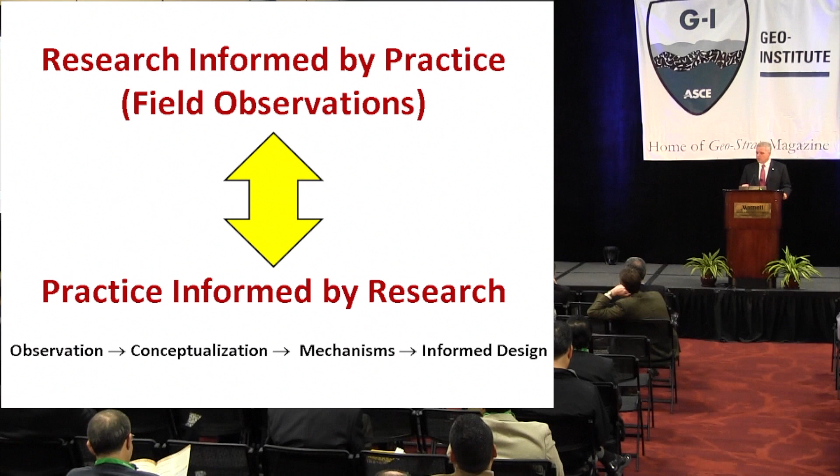I think of it at the very bottom of this slide. Really, we start with observation. We conceptualize a mechanism, develop and understand the mechanisms and quantify them, and then we build that back into our theory, and then we create informed design. This loop continues — it's an important part of the way we approach our practice.

So how does this all fit into geosynthetic clay liners? I think that'll be clear as we go through this. These are really neat materials — I think they've revolutionized the waste containment industry. First used around 1990, they've essentially been used in lieu of traditional compacted clay barriers, and over the last 20 years or so have replaced clay barriers as the standard mineral barrier we use in practice. GCLs have been very widely adopted.

In essence, we have a roll, almost like a carpet — a carpet-like structure that we roll out and place, a lot like a carpet. You can see sheets of it deployed here and over here. Roll it out, overlap it, sometimes put some bentonite within the seam, and we're done. It's a very quick, rapid, and effective construction process that saves money and functions well — certainly much more expedient than constructing a compacted clay liner.

What do these materials look like? They're really interesting — we'll have two geotextiles, typically one on the top and one on the bottom, with some needle punching holding them together, internally filled with granular bentonite, nearly dry bentonite. This almost looks like a sand-sized material, and when you look at this figure, it looks extremely permeable — it looks like water would flow right through it, right?

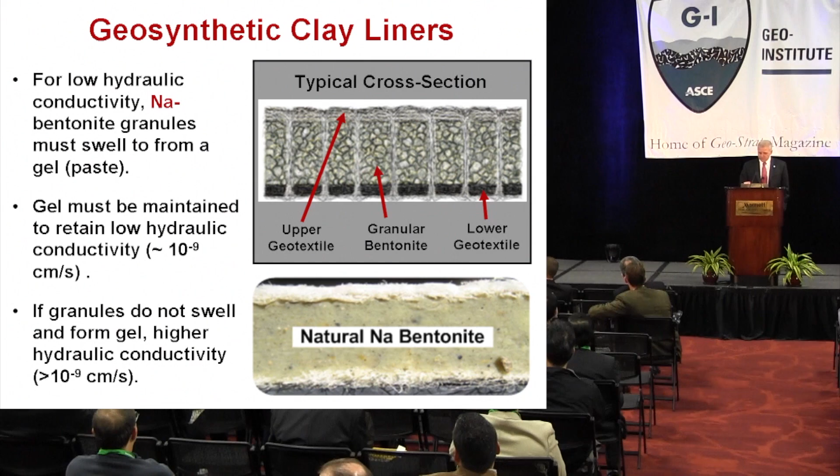I think this has been one of the things we've toiled with over the last 10 years — really understanding the coupling of these physical and chemical processes. And that's largely what we're going to talk about today.

Well, where did this get started? Our research is really driven by practical problems. I got started working on these physical and chemical interactions of bentonite probably about 15 years ago with my colleague, Professor Tuncer Edil. We were dealing with interesting large-scale case histories — one of them a big mining project in northern Wisconsin for a tailings facility, where we were trying to contain a leachate with a collection of different metals. Then another case history came along: one was a liner problem, the tailings facility, and the other was a cover problem — a barrier system placed over a coal ash facility in southwestern Wisconsin.

That's what I'm going to start with today — this latter case history, the cover. These were both problems that came up around the same period of time, dealing with GCLs, and it was the practice that informed the research. It began with a practical problem.

To illustrate, this is a surface barrier or cover placed over a coal ash facility. Looking at the surface materials, we have a vegetated surface layer — I have some of my engineering plants in it, you can see right here. My plant physiologist friends always make fun of my plants, they look far too simple. But I do have some roots in them, and those roots penetrate down through the surface layer, and at the bottom of that is a GCL.

That's our hydraulic barrier — the impedance to flow, preventing precipitation up in the atmosphere from making its way through the system and getting into the waste below. So the idea is a hydraulic barrier, a clay barrier, this GCL placed beneath a superficial vegetated cover soil, and this final cover altogether was meant to minimize the amount of liquid entering the underlying waste. Now, this was the first GCL deployed in Wisconsin at the time in a final cover.

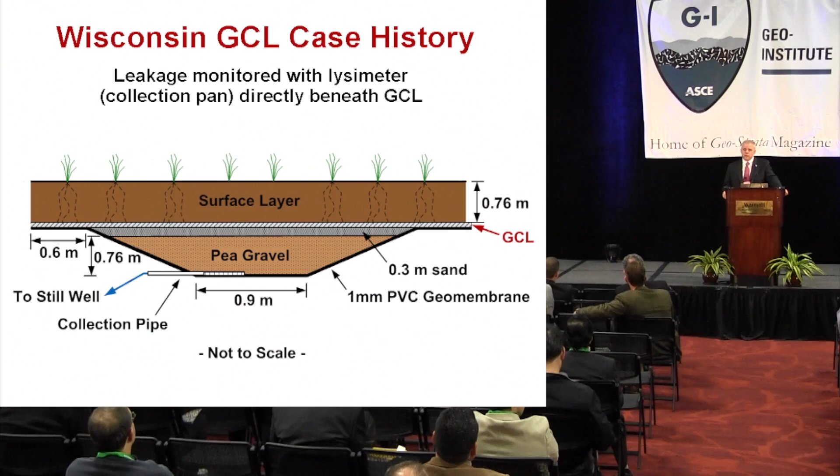If we know GCL has a hydraulic conductivity of roughly 2 × 10⁻⁹ centimeters per second under stresses typical of covers, and we do simple calculations understanding the variation in gradients throughout the year that we see in cover systems, I'd expect on the order of a few millimeters of flow through the system per year - maybe 1, 3, or even 5 millimeters per year depending on assumptions. So they began monitoring this, and the results were surprising.

This is cumulative percolation on one axis and time on the other. This is data collected by the engineers who designed this facility, which I graphed up later, but it's their data. Remember, I said a few millimeters per year - now notice my scale, I've got 1,000 here. So everything is within a couple orders of magnitude.

Within one year, one of the two lysimeters indicated that the percolation rate flowing through the cover system was much higher than anticipated - appreciably higher, probably two orders of magnitude higher, at least in one lysimeter early on. There was concern that lysimeter had a flaw, something done inappropriately, so they reconstructed it from scratch, ripped it out, rebuilt it, and began collecting data again.

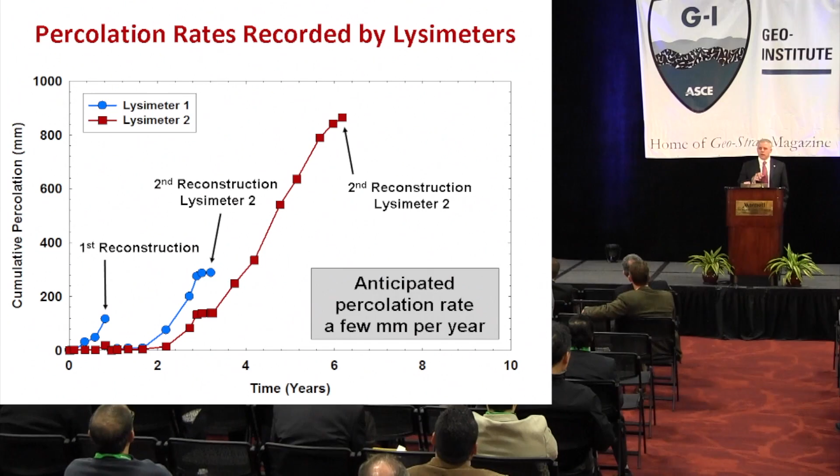About a year later, the percolation rate was climbing very high again, much higher than anybody expected. A little later, lysimeter two, though delayed, showed similar behavior - percolation rates tended to climb. So clearly something was not functioning as we anticipated. We begin here with an interesting problem: something we thought would function one way is behaving very differently, and the question is why?

We had the opportunity to dig things up - I do a lot of that. People who know me and work with me know I spend a lot of time in the field, in pits, looking at things. This comes back to observing phenomena and using that observation to drive our understanding, developing conceptual models and mechanisms, and ultimately informing our practice by understanding the processes. But it begins with observations.

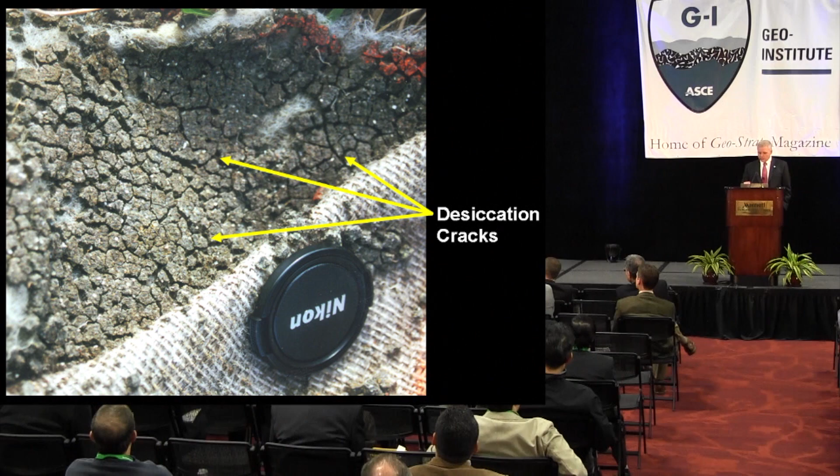This is one of the interesting observations we made during the exhumation - this is the bentonite meant to be the hydraulic barrier in this case. It doesn't look very impervious, doesn't look like that gel I showed you earlier. In fact, it's got lots of cracks in it - it looks very permeable. This photograph was taken by Brian Albright, one of my former PhD students, circa 2000.

We exhumed the GCLs in these lysimeters and found very interesting behavior. We did this at two different times, in 1999 and then 2002. One thing we found was that water contents were quite a bit lower than expected, particularly in 2002 - in our second exhumation, they were down around 20 or 30%. When we hydrate GCL in the laboratory, we'd expect water content on the order of 100% or so. These are much, much lower.

The other thing we observed, when we measure the swell index - a measure of the swelling potential of the bentonite...

The new GCL was about 24 milliliters per 2 grams, the kind of odd units we use for swell. Our swell index for these bentonites that we were taking out of the GCLs were appreciably different. So the swelling potential of this material had changed. It had been transformed during its relatively short life of a few years within the cover system.

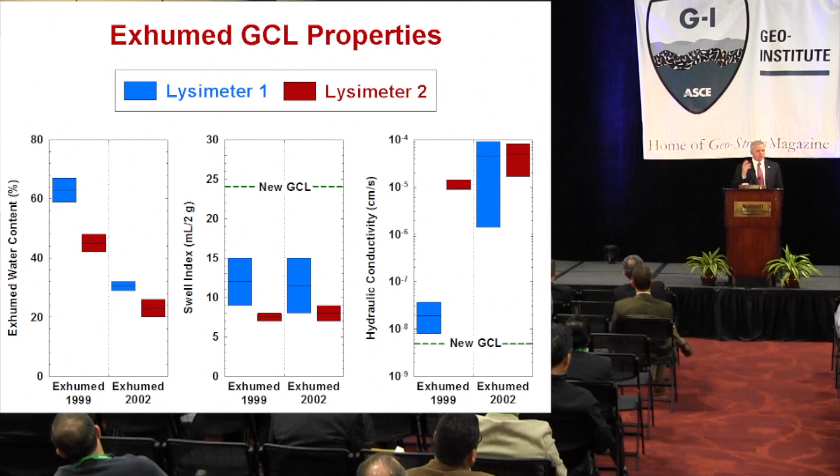We know bentonite is a highly swelling material. When it can dry and shrink and crack, we expect that when it rehydrates, it will wet back up, it will swell, and those cracks will seal shut. At least that's our underlying hypothesis. So we're beginning to question whether that hypothesis is valid.

At the time we were doing this, Steph Melchior, a soil physicist in Hamburg, had been doing almost identical work at the Georgswerder landfill in Hamburg. He hadn't built lysimeters, but he had buried GCLs and let them sit in the ground for a while, then exhumed them and found similar types of behavior. He hadn't measured the hydraulic conductivity at the time, but he exhumed them and found they were filled with cracks.

Then later on, a couple years later, he exhumed them again and measured the hydraulic conductivity, and we saw the same kind of things that we did. We began to wonder what mechanisms were driving this. We know in cover systems there's a very periodic wetting and drying process as part of the hydrology of the system. That was clearly a clue, something we were thinking about, that there was some wet-dry cycling present that was driving this process.

So we began with some very simple experiments. This is Ling-Chin Lin, one of my master's students in the late 1990s. We always believe in starting off with something very simple and then building up our knowledge base, building things that are more sophisticated as we go forward.

These were simple experiments where we would take a sample of a GCL, essentially a disc. We would permeate it in our laboratory until we got to a steady state condition, then pull it out of the permeameter and set it on the lab bench to let it dry. We would record the mass over time and wait till it stopped drying, so it lost as much moisture as it would within the thermodynamic conditions of the laboratory, and then we would begin the process again and permeate it. This is the type of behavior we saw.

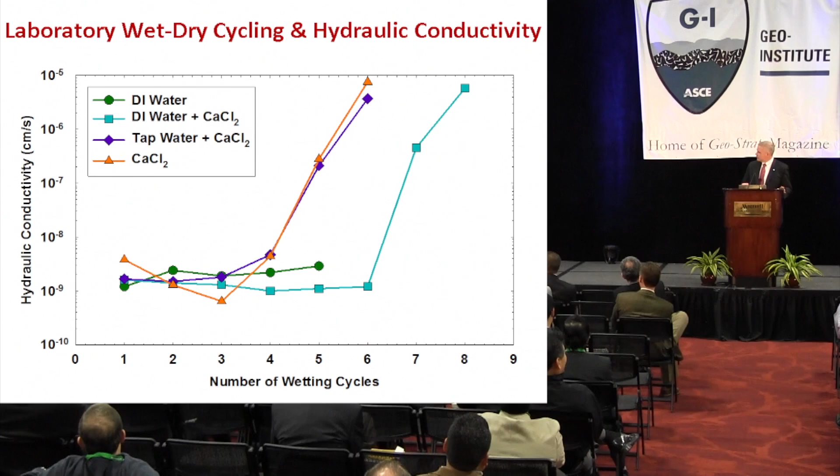So what did we see? The other thing that we looked at was the swell index of the bentonite. If you remember, with the test we ran with calcium chloride as the permeant water, the hydraulic conductivity increased appreciably. Those with deionized water, essentially a water which would not alter the chemical state of the bentonite, the bentonite would stay in its sodium or sodic state. Those remained essentially the same.

And if we look at what we see from the free swell of the bentonites in those GCLs, those permeated with calcium chloride actually began to diminish. So there was a process that was occurring, a chemical process that was altering the physical behavior of the bentonite. It was losing its ability to swell, and the swelling capacity and formation of that gel structure I showed early on is really key to the success of bentonites functioning. In contrast, if we permeated them with deionized water or tap water, they remained essentially the same. So no alteration versus a very significant alteration.

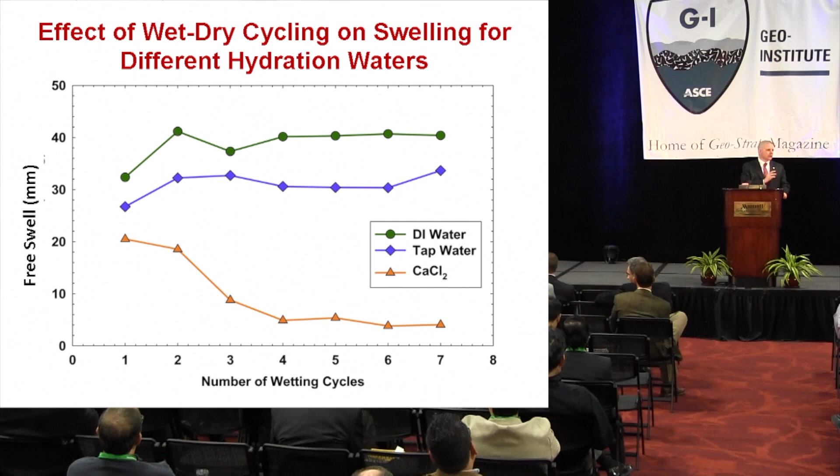You'll notice that on my previous slide, I showed that transition in hydraulic conductivity with the calcium permeants was right around 4 or 5 cycles of wetting and drying. We see on this graph here that right around 4 or 5 cycles, we've really kind of bottomed out on the swelling capacity. So the bentonite is transformed from a highly swelling material to a material that swells very modestly and doesn't have the capacity to potentially heal cracks, as we'll see in a minute.

There's actually been a great deal of work understanding the thermodynamics and the chemistry of calcium, magnesium and sodium in bentonite materials. There's a whole plethora of articles on this that go back to the 1950s. This is a classic paper published by Norrish in 1954, a graph from his paper, where he articulated the different components of bentonite swell.

Bentonite is predominantly comprised of montmorillonite mineral, and montmorillonite is a 2-to-1 mineral, so we have 2-to-1 sheets. Those sheets are fairly weakly bonded together, and when the bentonite is placed in water, the montmorillonite will hydrate. The water molecules associate with the charged mineral surface, and those sheets separate - as opposed to other minerals where they're fixed with a strong bond. In montmorillonite, they separate, water molecules make their way between the sheets, and that's what drives this. That's what makes bentonite such a highly swelling material. The sheets separate, water molecules fill that interlayer region, and it expands appreciably.

What Norrish showed were 2 things: this swelling process occurs in a couple of different steps. The first step is what he calls crystalline swell, essentially the first steps of hydration, where the first layers of water molecules associate with the montmorillonite surface. That results in a swelling of roughly 1 nanometer. We call that crystalline swell, shown in this region here.

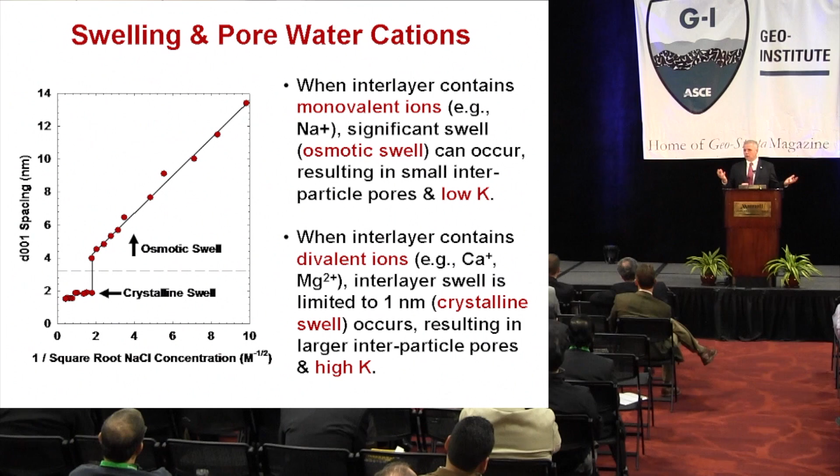When they were divalent cations, like calcium and magnesium, osmotic swell was no longer present. We only got crystalline swell. So if we have bentonites that are primarily calcium and magnesium bentonites, they don't swell. Those with primarily sodium cations on the surface do swell. So a fundamentally different behavior between a calcium magnesium bentonite and a sodium bentonite. This goes way back to the 1950s from Norrish's work.

I think this photograph illustrates this really nicely. We took a bentonite essentially at the same mass per area as we would have in a GCL. And we ran the old GRI swell test. This is a test where you would take the bentonite out of the GCL, put it in a CBR mold, put a CBR plate on top of it, and then put an LVDT on top of that. Then you pour water into the mold, watch it swell, and record the swell.

You would end up, if it was swelling a lot, with this large patty here that you see on the top. This is a bentonite that's been hydrated in deionized water. Look at that tremendous swell, that gel structure. It's really transformed from a granular material to a gel material.

Let's replace the pore fluid from deionized water to a stronger calcium solution where that calcium will replace the sodium in the bentonite. Very different behavior. What do we see here? We see virtually no swell. You can almost, if you look carefully, see the bentonite granules in this slide. So there's been virtually no swell at all. Same material, but very different physical behavior depending on the chemical condition.

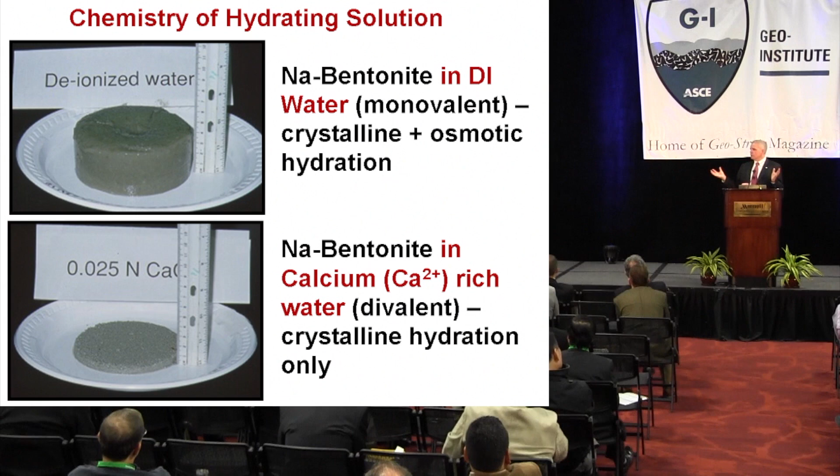So the chemical condition alters the physical behavior, and ultimately is going to alter the hydraulic conductivity as well. If we look at these photographs, actually prepared by Joe Scalia for me, I think they illustrate this as well. This upper photograph is a sodium bentonite, again hydrated in deionized water. It forms a gel-type structure, and you can't see any of the original granules.

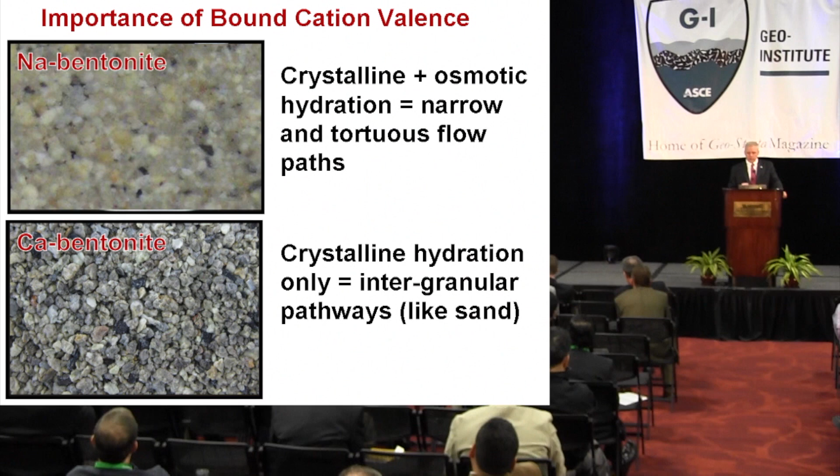The same material, but with a calcium bentonite, again looks like sand. So one is very impermeable, the gel structure is very impermeable, and the granular structure in the calcium bentonite, as you can imagine, is very permeable. So the chemistry is really important in this linkage of chemistry and physical behavior.

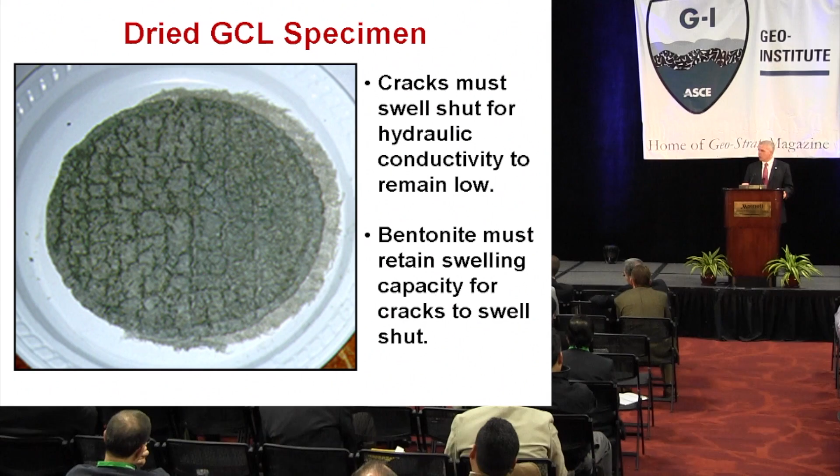You can see the cracks in the GCL. If this GCL is going to be effective when it rehydrates, that bentonite needs to swell, those cracks need to close. If the bentonite loses its ability to swell from a transformation from a sodium or sodic form to a calcium magnesium form, those cracks won't close, and that's what drives the increases in hydraulic conductivity. So the behavior we saw in the field with very high hydraulic conductivities, we attributed largely to calcium and magnesium exchange coupled with wetting and drying, and the inability of the transformed material to reheal itself due to its loss of swelling capacity from the change in chemical structure.

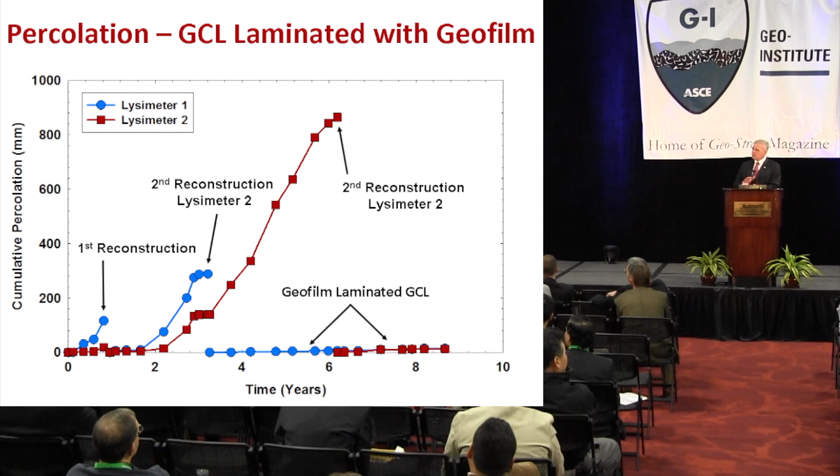Interesting data here as well. Later in the project, they replaced the original GCLs with a geofilm laminated GCL, a composite where the GCL has a geomembrane laminated to the surface on top. The percolation rates to this day remain very, very low at this site, on the order of a couple millimeters per year. So the laminated product, the geomembrane and GCL combination, worked exceptionally well.

We were really interested in this, so we wondered how general this behavior was. We had this one case history, and of course we can't draw generalities from one project. A friend in Germany had observed this, and we had observed it too. It looked like this was an issue, but I wasn't sure how common this phenomena was. So, like a lot of good academicians, you start pinging your federal agency folks and say, hey, I have an interesting idea, can you help me fund a study?

So I did that, and we started off with a small study where we went off and exhumed 4 different covers around the United States, 3 of these in Wisconsin and 1 elsewhere, to look at the condition of the GCLs.

I just had one site, and I wanted to see if this was more general. I picked these sites in a way that I thought would help my hypothesis. I had 3 covers on the right, which were essentially a vegetated soil layer over a GCL, ranging in thickness between about 600 and 800 millimeters, with a GCL at the bottom and different subgrades underneath. These were essentially like the earlier case history I showed, just different sites.

The assumption here is that wetting and drying is one of the driving mechanisms in this process. The other assumption is that calcium and magnesium are exchanging for the sodium, and that the calcium and magnesium was coming from water percolating down through the cover soil, eluting the calcium and magnesium from the cover soils, as we know occurs.

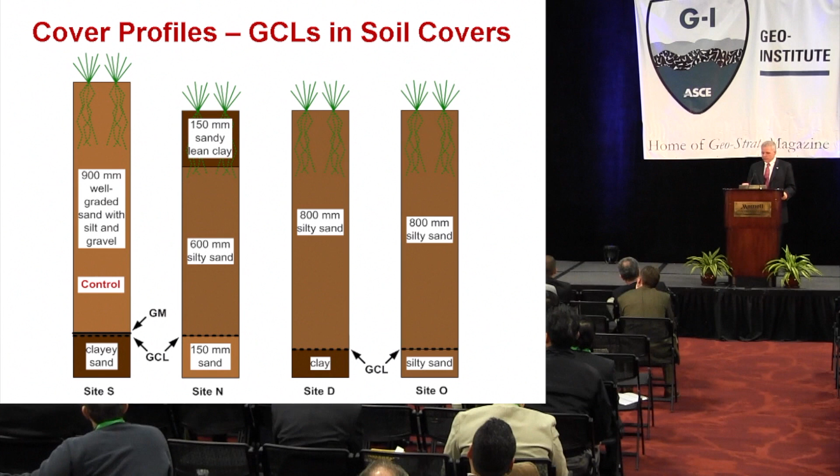So we embarked on this very fun project to go dig these up. We spent a lot of time in pits digging things up and observing them, at the 3 different sampling locations in Wisconsin.

At the same time, my friend Clark Lundell of Republic Services was very interested in this. He had a site in the Atlanta area where he had a lot of leachate in his landfill and couldn't figure out why, since they had capped it, and usually at their sites leachate generation rates drop off appreciably after capping, but he was still getting a lot of leachate. It had a GCL on the cover, so he asked me to come down to this site, site O in Georgia, and exhume the GCL there as well.

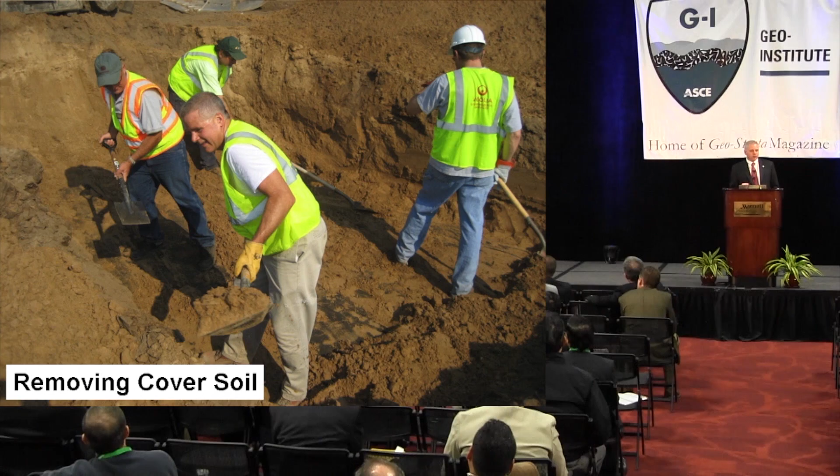So we went out and dug them up. We do everything by hand... well, we got a backhoe out there, dug down close, and then did the rest by hand. This is actually at one of our sites, Site E, which I'll talk about a little bit later.

We exhumed the cover soils, and then we exhumed samples of the GCL. I'll show you a detail in the next slide, but we used PVC panels, putting a lot of attention into minimizing disturbance of the bentonite when we extract the sample. These PVC panels are placed on top of the GCL.

There it is, a PVC sheet. These are about 300 millimeters by 300 millimeters and probably 5 millimeters thick, just meant to be a nice stiff material. We cut around the perimeter of that, cutting the GCL cleanly, and then we pull and slide the GCL on top of it, as you'll see in a minute.

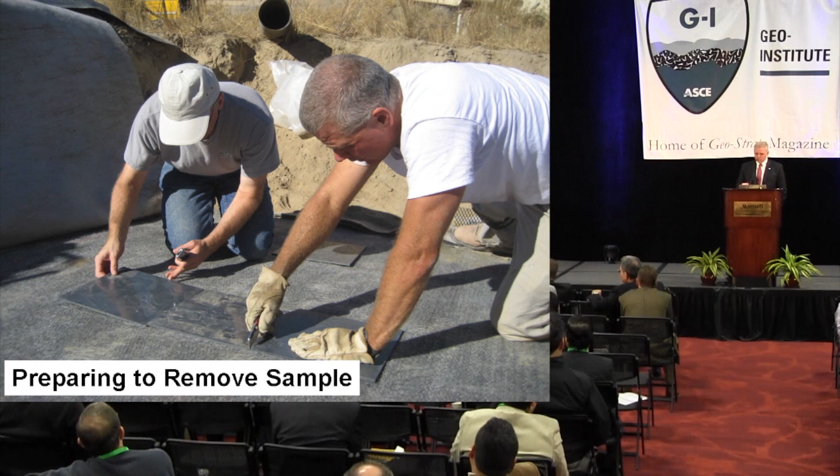You can see in my right hand I've got a razor knife, and I'm cutting the GCL, scoring it right around the edge. This is Jim Olsta, by the way, from CETCO. I'm really grateful to CETCO, a GCL manufacturer, who has been very helpful in this work, supporting it not only financially but actually going out in the field and working with us. This is our site in Boardman, Oregon.

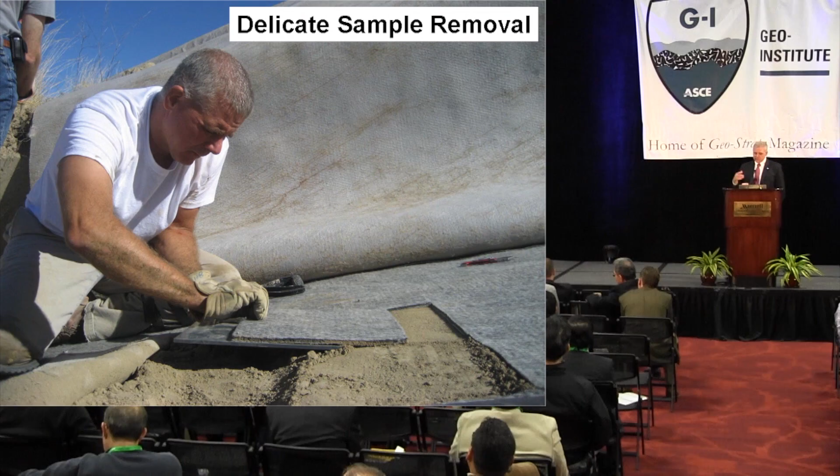Here's a picture of exhuming the GCL. We've scored it around the edge, cut it with the razor knife, and then very carefully slide the GCL onto this PVC plate. Then we wrap it with plastic to prevent it from desiccating, and we bury those plates in a series of tubs, trying to keep stress on the GCL to prevent any stress relief.

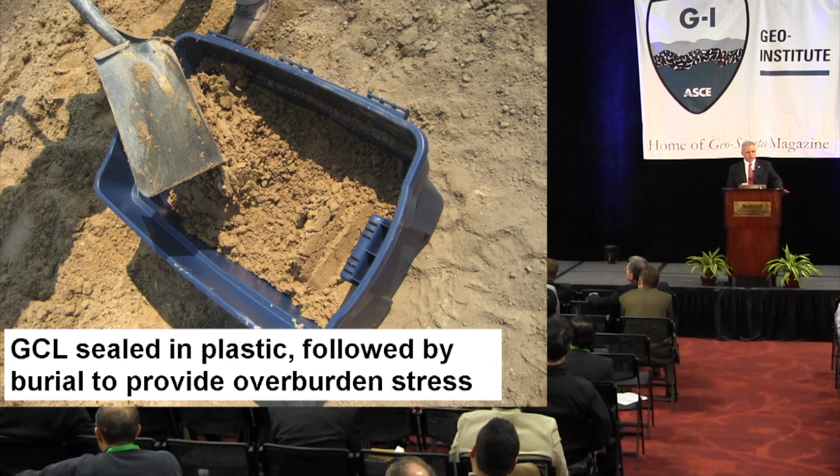We can't simulate the whole cover system, but we try to get at least roughly a third of a meter on top of the GCL if possible, if not even a little bit more. So we bury them in tubs and bring them back to the laboratory.

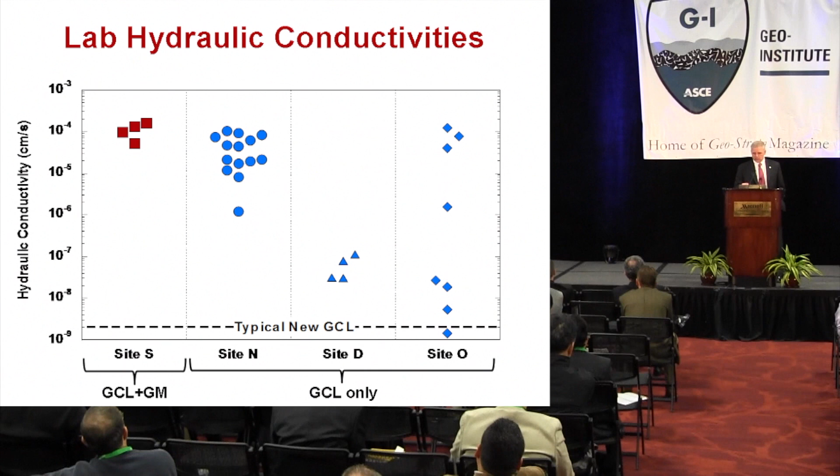So interesting—we didn't see precisely the same thing we saw at that one case history. We actually saw different types of behavior at different sites. Interestingly enough, the composite perhaps had the most permeable samples, and that really got us thinking, what's going on there? To this day this hasn't been fully proven out, but I'll get to more on that in a minute. This was an important learning experience for us as well.

We also ran swell index tests on the bentonites from each of these GCLs. Looking at the free swell graph in green, the bentonite used in these GCLs, when new, is roughly about 35 milliliters per 2 grams. All of the GCLs we exhumed had swell indices around 10 or lower, which is the swell index associated with a calcium bentonite, not a sodium bentonite. So it started at 35 and transitioned to 10 over a service life of 4 to 8 years, roughly, depending on the site.

If we looked at the relative abundance of sodium in the exchange complex—essentially the collection of cations balancing the negative charge on the surface of the bentonite—typically in the bentonites used in these GCLs, about 80% of the cations were sodium.

When we looked at the exhumed GCLs, at most 20% sodium remained, so there's a great depletion of sodium in these materials. The physical and chemical processes are coupled together. We had a transformation from a sodium bentonite to a calcium magnesium bentonite, which altered the swelling behavior and altered

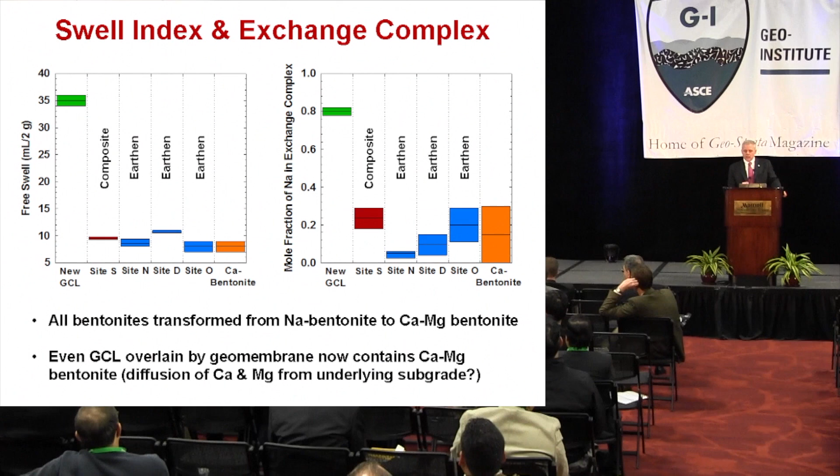the hydraulic conductivity, but still doesn't explain why we got this variation from site to site. Interestingly, I talked about that composite system with the geomembrane, which was meant to cut off water from above that would carry calcium and magnesium and prevent exchange. And yet it was completely exchanged. At our site S, the swell index is around 10, and most of the sodium has been replaced by calcium. What's going on? This isn't something we expected at all.

Very different. The water content was an important issue that differentiated the data we observed. The GCLs that had become hydrated and remained hydrated, essentially became wet and remained wet, retained lower hydraulic conductivities.

Those that had dried, potentially going through a desiccation cycle or several, had much higher hydraulic conductivity. So there was a clear dependence on water content: if the GCL got wet and stayed wet, it tended to have low hydraulic conductivity, whereas if it hydrated and perhaps desiccated, it tended to have high hydraulic conductivity. The variation I showed on the other graph was very closely tied to water content of the bentonite. The wet bentonites had low hydraulic conductivity, the dry bentonites had much higher, having undergone shrinkage and cracking and becoming more permeable. That threshold was somewhere around 80 to 100 in terms of water content.

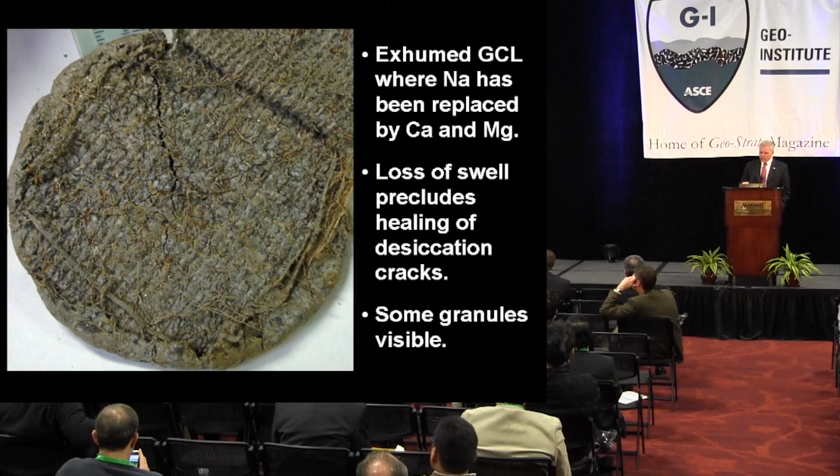The other aspect, backing up briefly, is that if you look at these hydraulic conductivities on the wet ones, they're low, but not as low as what you'd expect for a sodium bentonite right out of the box. I started off saying it's about 3 times 10 to the minus 9 centimeters per second for a GCL with deionized water at 10 kPa, that's about what you get. Almost every specimen run at that stress level gives around 2 or 3 times 10 to the minus 9. These are an order of magnitude more permeable, maybe 50 times more permeable. Why is that? We began to wonder about that as well. They are wet, so it's not a desiccation process, there's something else going on.

We had the opportunity to run some very interesting experiments, a long-term hydraulic conductivity test with a GCL using a dilute calcium solution, 12 millimolar to simulate natural pore water. This is another one of these graduated termination criterion tests. These are long tests, running 1,500 days at the end. You have to have patience to run these tests.

But what you see is that early on, the hydraulic conductivity remains low, and then it's gradually increasing. So there's some chemical interaction here as well that's altering the physical behavior. The hydraulic conductivity is changing as the permeate interacts with the surface.

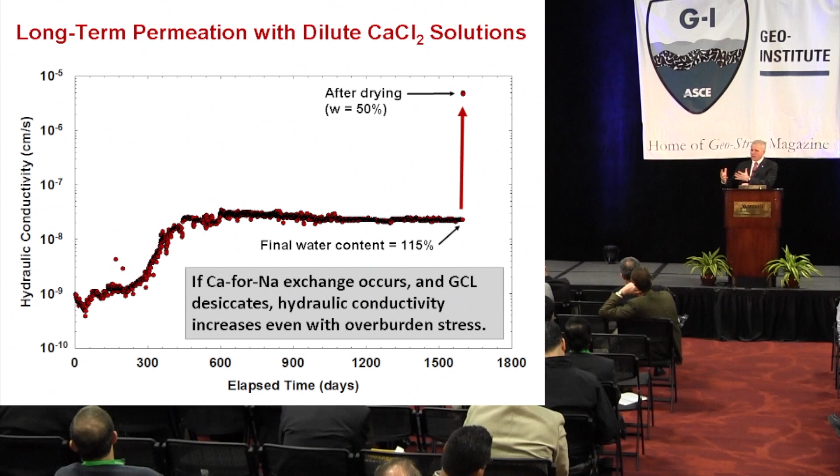So those exhumed samples, again, in the field, we're having a transformation from a sodium bentonite to a calcium magnesium bentonite. If it remained wet, it had a low hydraulic conductivity, although not as low as we would initially expect with the sodium. If it went through that transformation and then dried, it changed dramatically, and we had a much more permeable structure. So we saw there's a physical and a chemical linkage together.

So what's going on here? I talked about how we start with conceptualization, observation, conceptualization, building in mechanisms, and that then drives our theory. So this is our starting off, just a little illustration of the mechanisms that are occurring in the bentonite during these different phases. We'll start off with our

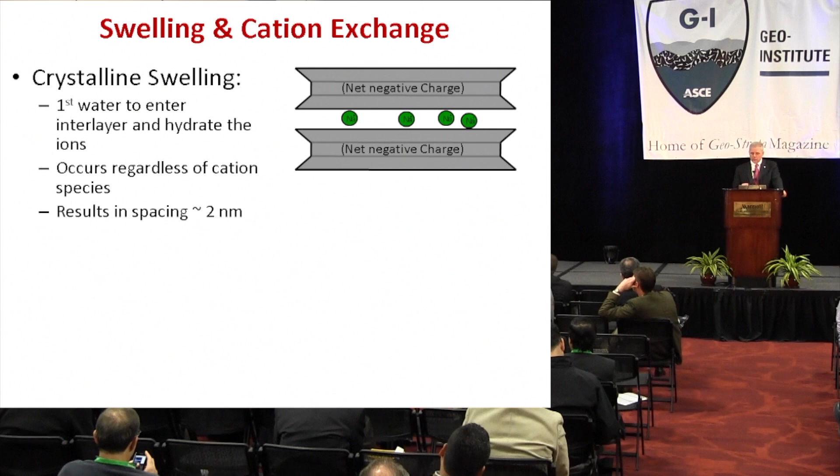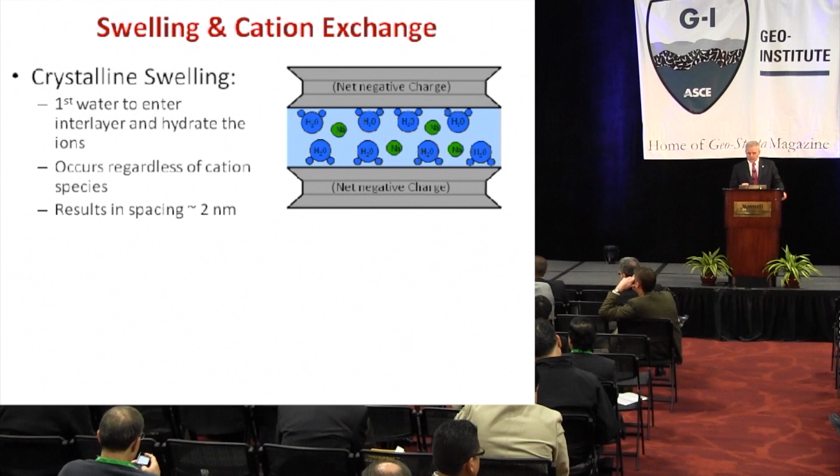2-to-1 sheets in our montmorillonite mineral here with some sodium on it. Those are the green circles in the interlayer. That space between the sheets is called the interlayer. And we add some water to that material, and we have that crystalline swell. We get a couple layers of water molecules in there starting to swell the bentonite. And then we go into an osmotic swelling process, depending on the concentration of the solution, and we get more

swelling. That's that osmotic swelling. That gives us that gel-type structure, which gives us about 10 to the minus 9 centimeters per second. Fully hydrated sodium bentonite right out of the box.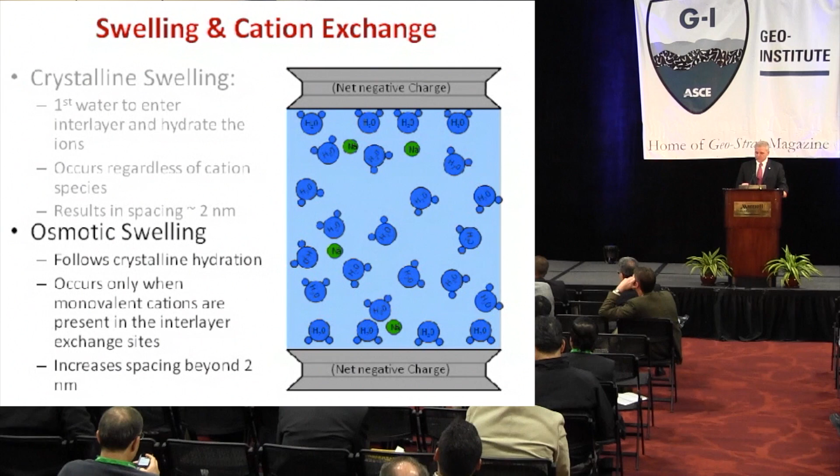All right, we'll change that a little bit. Let's now have, we're in the field, we've hydrated, it's a sodium bentonite, but there's also a preponderance of calcium and magnesium all around this bentonite, and we know thermodynamically that calcium and magnesium are going to replace the sodium. And so what we see, slowly we'll have some of these calciums move in.

Again, we have to have charge balance, so we'll replace 2 of the sodiums for every calcium. And we see some collapse of the interlayer water due to the presence of that calcium, so it's contracting. That swell is actually being reduced some, but not dramatically, by the presence of the calcium. So a lot of that water is locked in place essentially electrically with the mineral surfaces, but we do get some compression of that interlayer water when the calcium occurs.

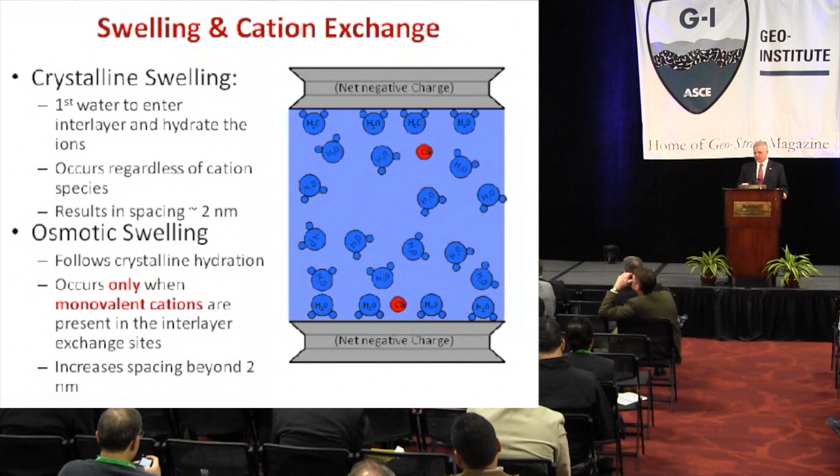And that's what's actually driving that change from about 10 to the minus 9 to 10 to the minus 8, that transformation from sodium to calcium bentonite, and a modest reduction in swell with a corresponding increase in hydraulic conductivity.

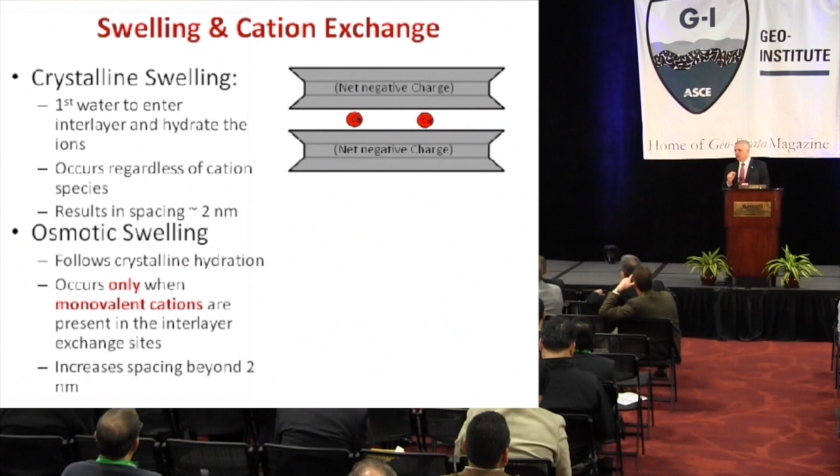Now let's dry it out. We're in the field, it desiccates, we have root water uptake, it's drying the bentonite. We've taken that water out, but now we have a bentonite that's a dry bentonite, but it's a dry calcium bentonite. It's different. It's not the same material we started with.

And it wets up again, and it gets 2 layers of water molecules associated with crystalline swelling, but now it's a calcium bentonite. Now it's rehydrating in the field, and this is all it does. This is where it stops. The osmotic phase no longer occurs.

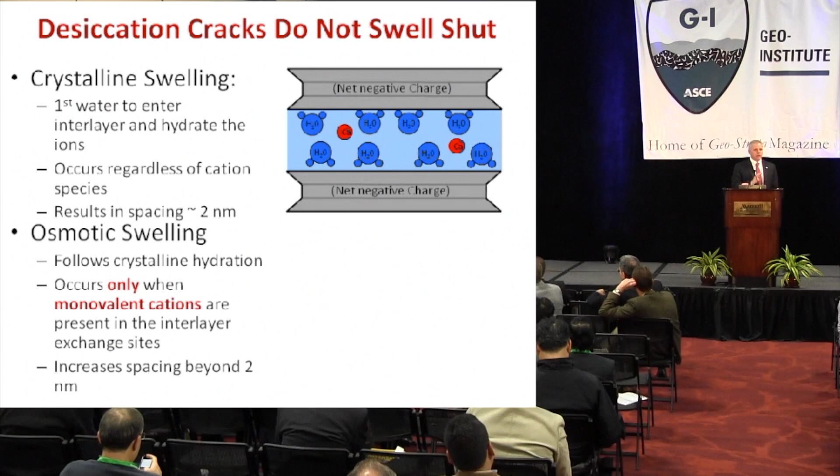It's a calcium bentonite, and we know that calcium bentonites only undergo crystalline swelling, and that's the end of the swelling process. This is very consistent with what we see mechanistically and what we know about the behavior of calcium and magnesium bentonites.

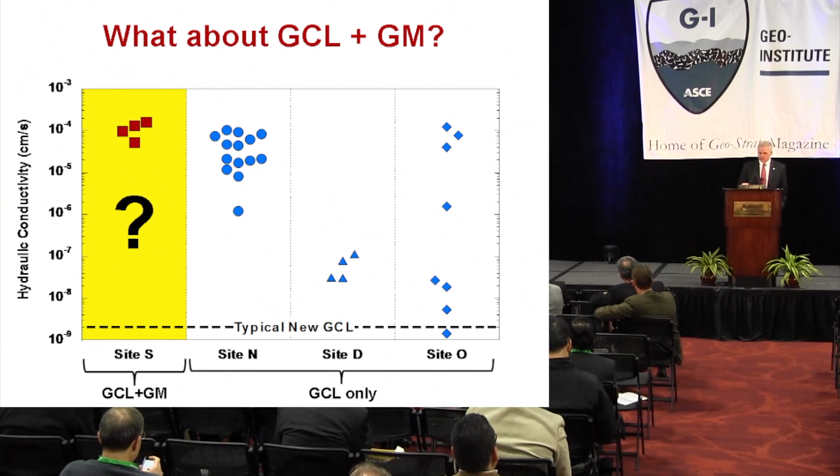Well, that doesn't answer our question about the case where we had the GCL plus the geomembrane, our proof case that ended up being the humbling case, the one with a question mark. I was interested in this, so I went out and convinced some folks that we ought to dig up more of these and find out what's going on with GCLs overlain by geomembranes.

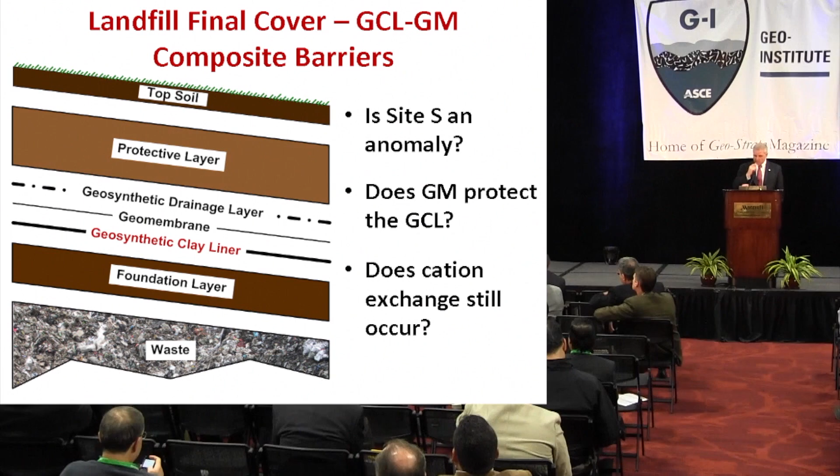So we did that. We looked for sites that had cover systems with a composite barrier, again a GCL overlain by a geomembrane, typically in a structure that looks like this, and then we exhumed it. We did two sites out in the west.

Apple Valley, California, a community that's never had an apple tree. That's a developer's idea. My brother lives right there, so I go there very frequently. I know what it's like.

That's north and east of Ontario. And then Boardman, Oregon, another site up here. These are two of my field sites for another project we had, both of which had composite barriers.

Site S again. Site E is another site in Wisconsin. This is a site where they're doing vertical expansion, where the cover was essentially being removed from the facility, so we had an opportunity to exhume that. And then another site, Site F, in the southwest corner of Michigan. These are the profiles, varying thicknesses, but all having a composite barrier, geomembrane over a GCL.

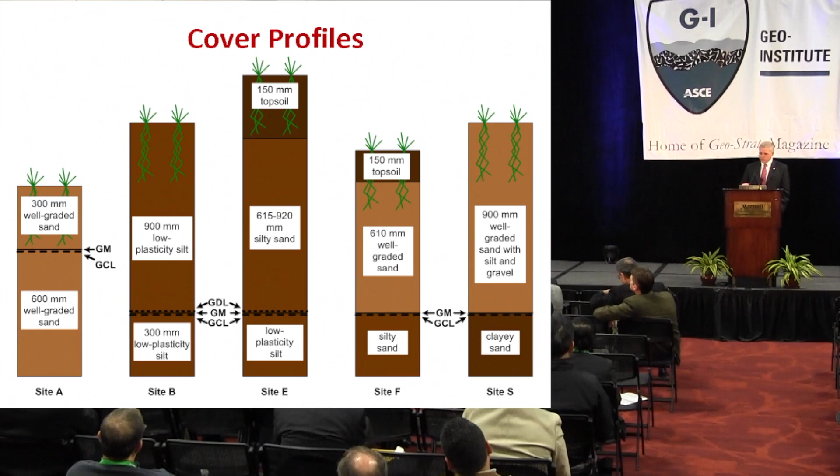And we went in and exhumed these. Interestingly enough, we saw very different types of behavior. This is what we expected we would see when I exhumed that first composite barrier. This is actually the one at Site A.

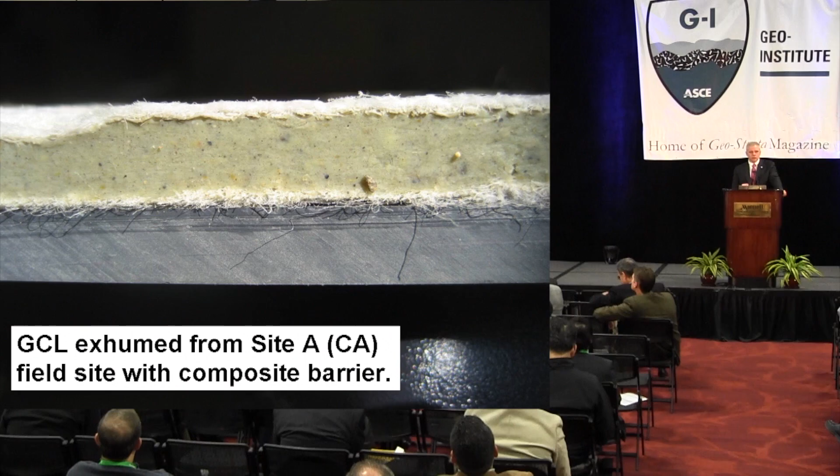This is Apple Valley, California, on the edge of the Mojave. So if there's a site where it's going to be dry and hot, this is it. They get 4 inches of rain a year, at the edge of the Mojave Desert. Look at this GCL, look at that exhumed GCL. It's a wonderful, beautiful material, gel structure.

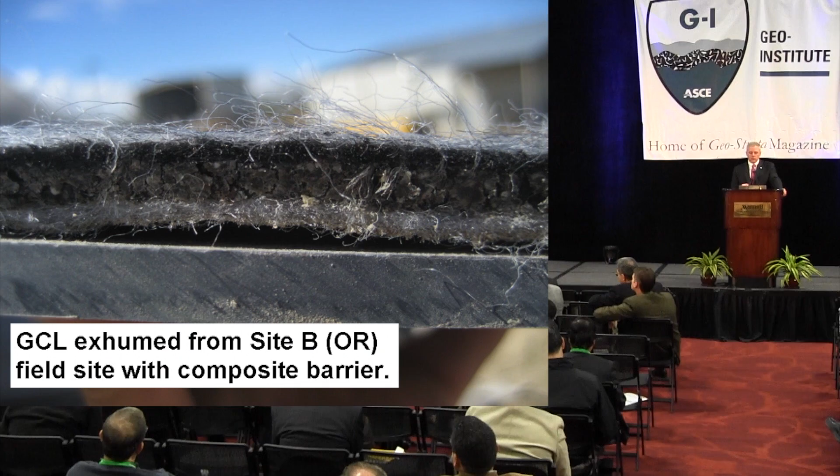Here's Site B. Now it looks a little different. Site B is also in a very dry climate. Eastern Oregon is very arid, not quite as arid as the Mojave, but probably 6 inches of precipitation a year, very arid, but a very different structure. Notice the bentonite here doesn't look nearly as soft and compliant. We can actually see some of the residual or remnant granules, and we can see cracks between those. If we zoom in a little bit, you can see those cracks very clearly. So this is a different behavior.

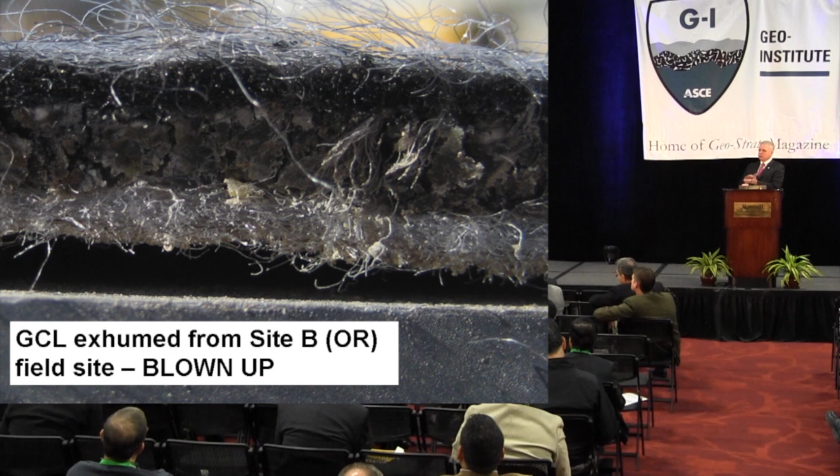Two systems, similar climate, similar hydrologic environment, geomembrane on top, but two very different behaviors. Why are we getting that? We're beginning to ask these questions, beginning to look at our data, our swell index data.

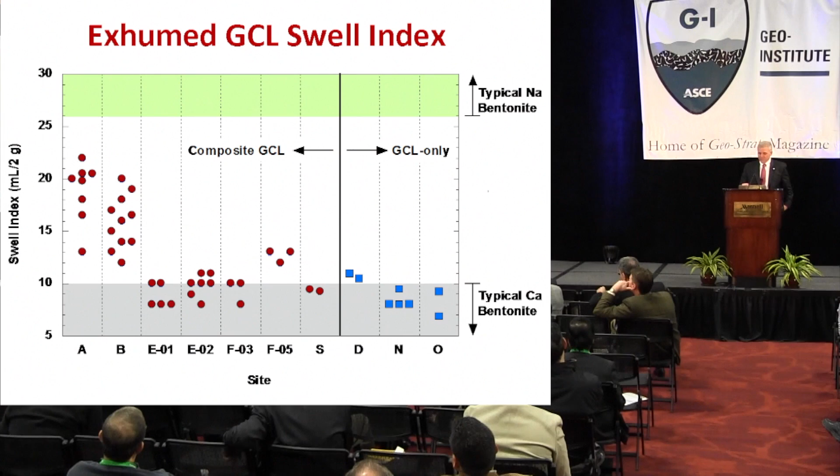Again, we see all of our sites with composite barriers have undergone some transformation. The swell index here for these sites is lower than what we get for a new GCL, which would be up above about 26 milliliters per 2 grams, depending on the brand we're using. So there's been a transformation. Some of them, even though they have a geomembrane, are completely transformed to a calcium bentonite, typical of a calcium bentonite. So we see a transformation in the swelling behavior, even with a geomembrane on top.

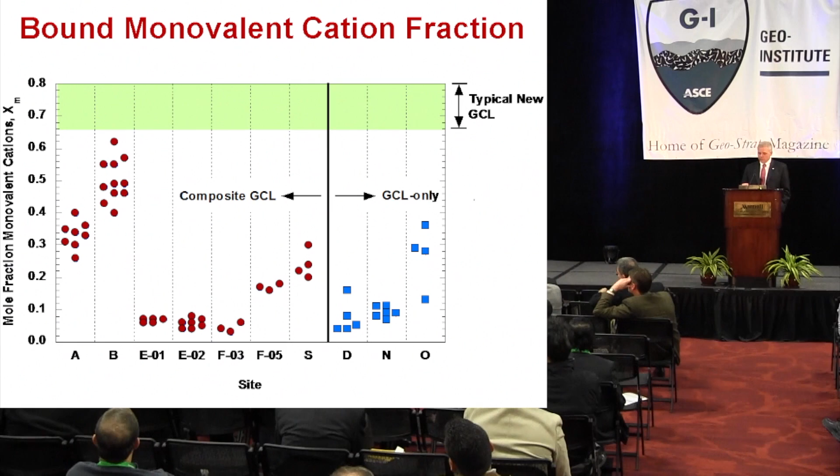We see the mole fraction of sodium: essentially no sodium, very little or no sodium in these GCLs, and a reduction in the amount of sodium, just depending largely on how long they've been in service.

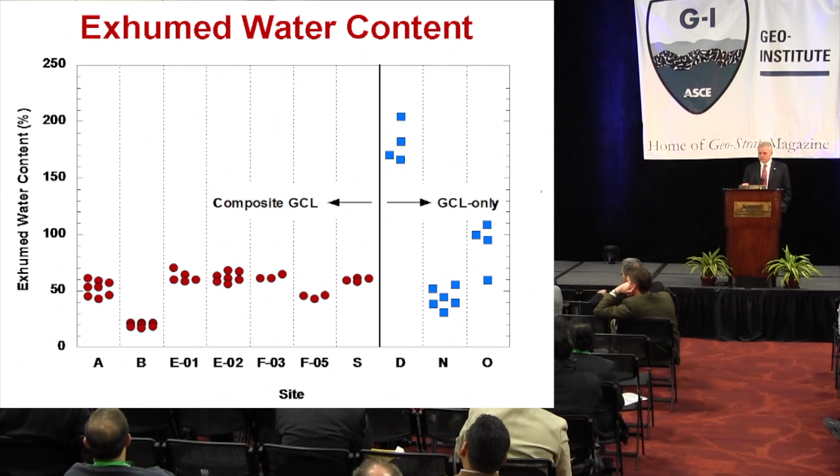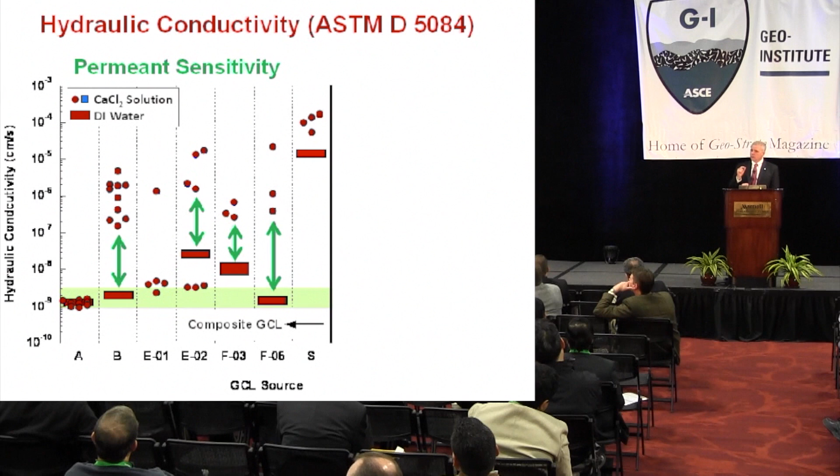There was this permeant sensitivity that we observed, and we're going to talk about that briefly in a moment, and why it's important in how we might select waters that are realistic. Depending on what water we use, we got different results. It's very important that we use a water that represents the field condition as precisely as possible.

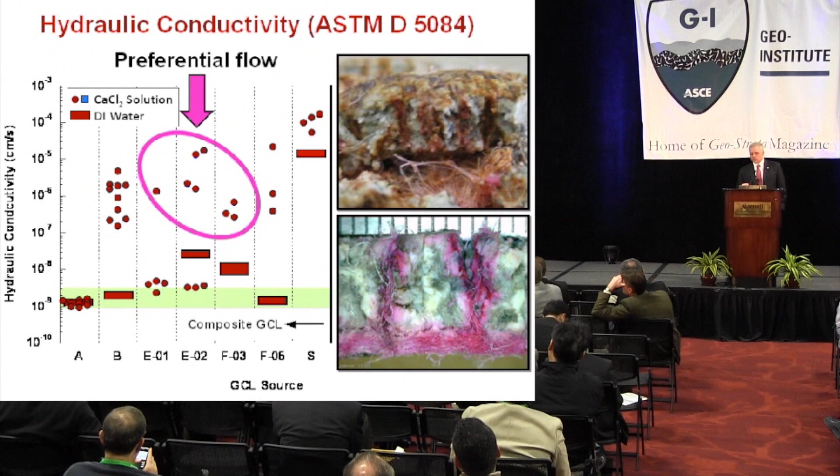Here's another one—this is site F in Michigan. This is site E in Wisconsin. Again, here's rhodamine dye running along these needle punching fibers. So there's some other phenomenon that we never thought about coming into play here. We're not sure about that.

I'll talk about that briefly in a minute. One of the things we observed from that data set is that the permeant chemistry we used to test these GCLs was particularly important—even subtle variations, just subtle changes in molarity. And we looked at this.

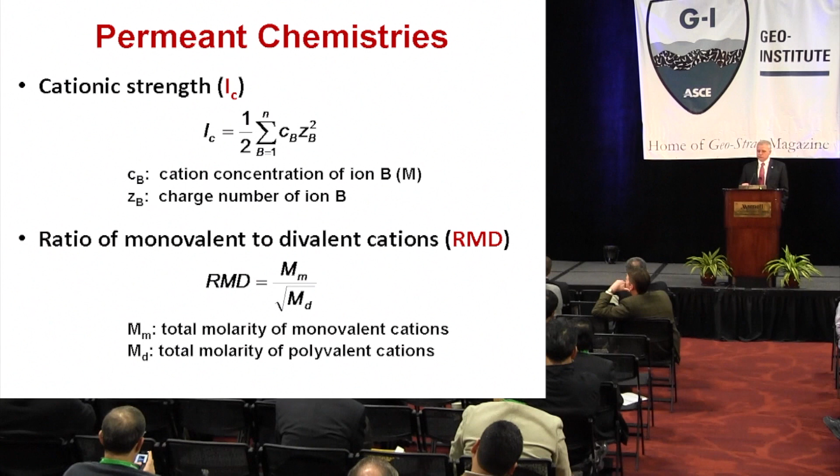We described the water chemistry of permeant solutions for bentonites using two parameters. One is what we call the cationic strength, which is like the ionic strength, but without the anions—so it's a cation-driven strength, essentially a gross measure of concentration. The other parameter is RMD, which describes the relative abundance of monovalent and divalent cations. High RMD solutions are primarily monovalent; low RMD solutions are primarily divalent cations.

We've looked at a great deal of soils from around the country, about 15 so far, and measured both the cation strength and RMD of the pore water, and we get quite a variation. We find that the cation strengths are fairly low, as we'd expect, and the RMDs tend to be very low as well, because they tend to be predominantly divalent.

From this, we've been able at least to recommend some solutions. We have what we call our conservative water, which is essentially divalent, as you'll probably see in the field, but not a purely divalent solution. This is in contrast to, for example, a standard water in ASTM D5084—that's the red dot here. I lost my cursor again—red dot over here, that's standard water. We now have in ASTM D5084 the conservative water, and we also have the average water as well.

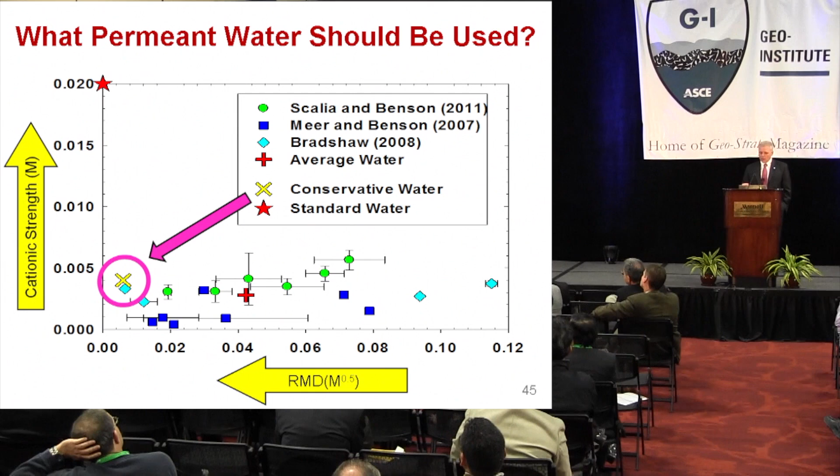This red cross marks waters that are in the standard and are recommended for testing exhumed samples.

So, other things we observed with those GCLs that didn't have preferential flow: hydraulic conductivity again was very much driven by the water content of the bentonite. We saw water content was important here, but here we don't have wetting and drying occurring—it's just hydrated bentonite, but again the water content is a big player. We need to get the bentonite wet, get it into that gel structure, and then prevent that gel structure from being altered. The specimens that had high hydraulic conductivity had low water contents; those with low hydraulic conductivities had higher water contents.

What we found is that those water contents were very closely tied to the subgrade water content, and in fact all of the specimens that had low hydraulic conductivity... this is mislabeled, I apologize, over here—these are, yeah, I got a goof up over here. This says hydraulic conductivity, but these numbers aren't right over here.

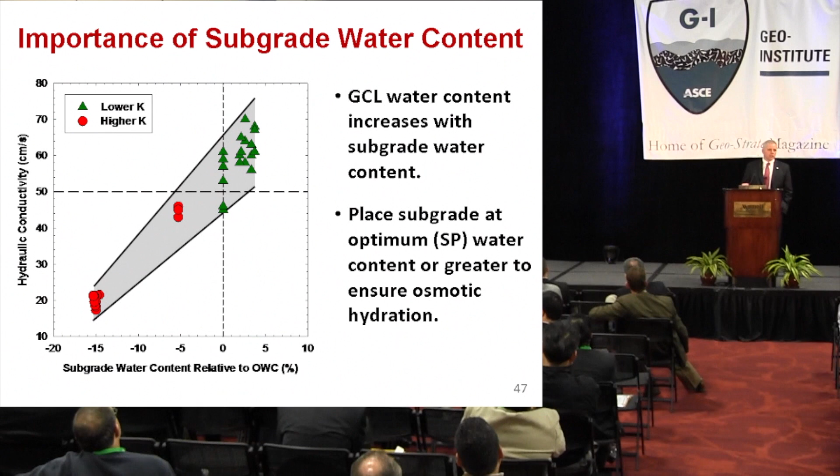Let me just say what this graph is supposed to show. What we found is all of the specimens that had low hydraulic conductivity had higher water contents, and all of those were placed in subgrades that were compacted wet of optimum water content. If the subgrade was compacted dry of optimum water content, there was not sufficient water to adequately hydrate the bentonite, and what was actually happening in the field is that the bentonite was exchanging—we were getting a calcium for sodium exchange without the presence of water, and we never got a full osmotic swell or a low hydraulic conductivity.

So the mechanism we saw: we start off with a subgrade, as we see at the bottom, a GCL placed on top with some sodium on it. We're placing it on the ground with a geomembrane on top, and as we place it, water will migrate from below to hydrate the GCL—moisture migrating up, hydrating the GCL.

And it'll move up, and we'll get a nice swollen structure if we have a wet subgrade. If we have a dry subgrade, we don't have enough water, we'll end up with a very modest amount of swelling, and in fact we never get into that osmotic swollen state. Over time, we'll get exchange of calcium for the original sodium, and we'll retain a swollen state here.

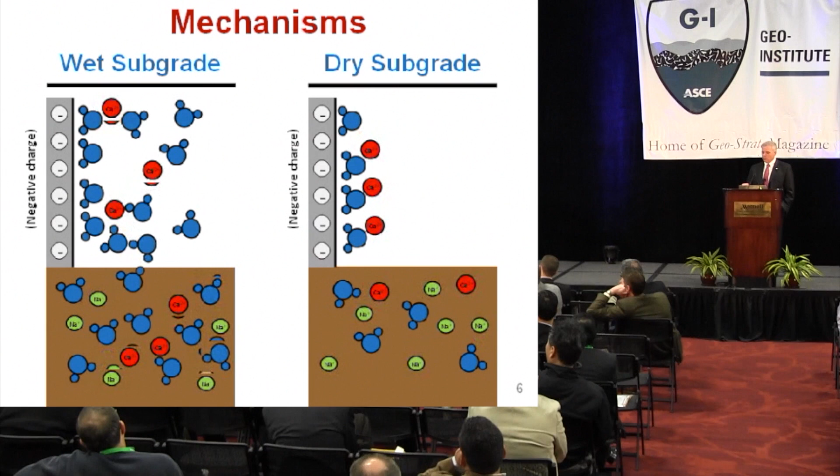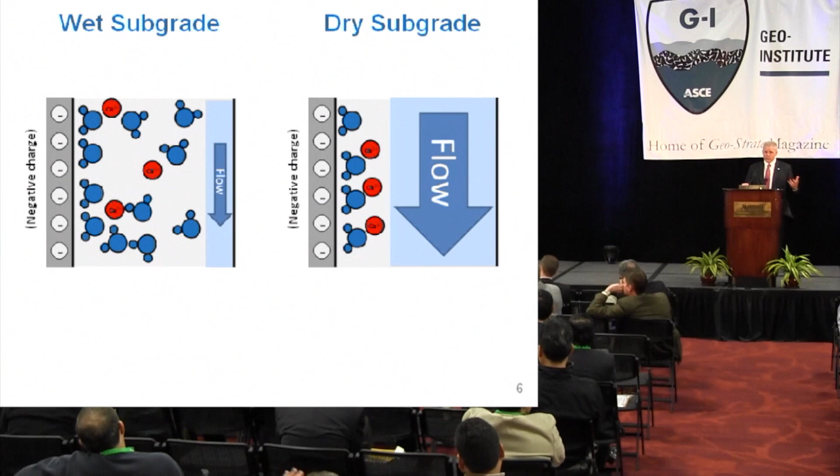Perhaps it'll compress some, but largely a gel structure. Whereas this dry subgrade condition will end up never having sufficient water to actually get out of the crystalline state, and we'll end up with a much more permeable GCL. So we end up with flow paths that are very small for wet subgrades and large on the right for dry subgrades, because we remain in that crystalline swell state. So the chemistry and the physical behavior are tied together.

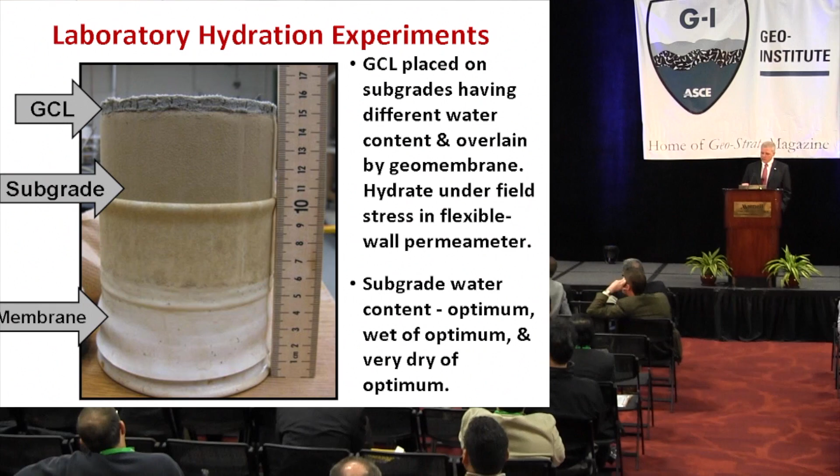We did some experiments in the lab to prove this out. These are essentially just a subgrade on which we placed a GCL. We wrapped it in a membrane, put it in a flexible wall permeameter, and then hydrated it for different times. Again, these are fairly long tests.

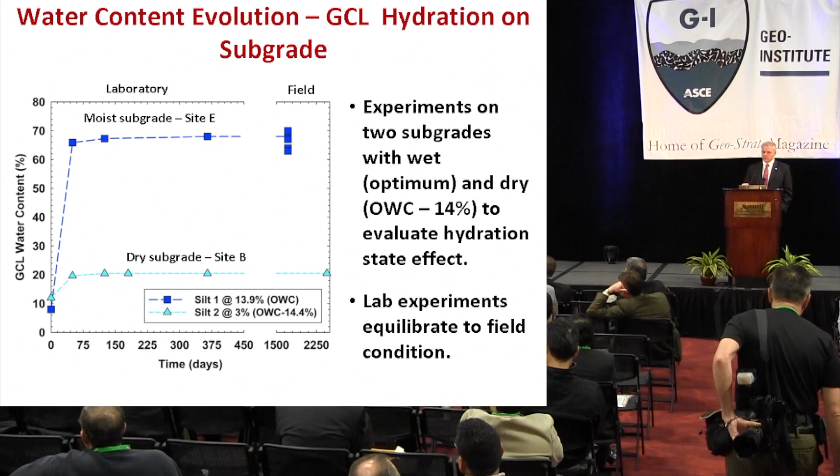We did these for a dry subgrade and a moist subgrade, and what we observed is that the water content would accumulate, and over time, if we had a dry subgrade, the water content of the GCL was dry, and our laboratory test mimicked our field behavior very well. We see that in the moist subgrade as well, that the laboratory test would approach, in this case, about 70%, and that's largely what we observed in the field.

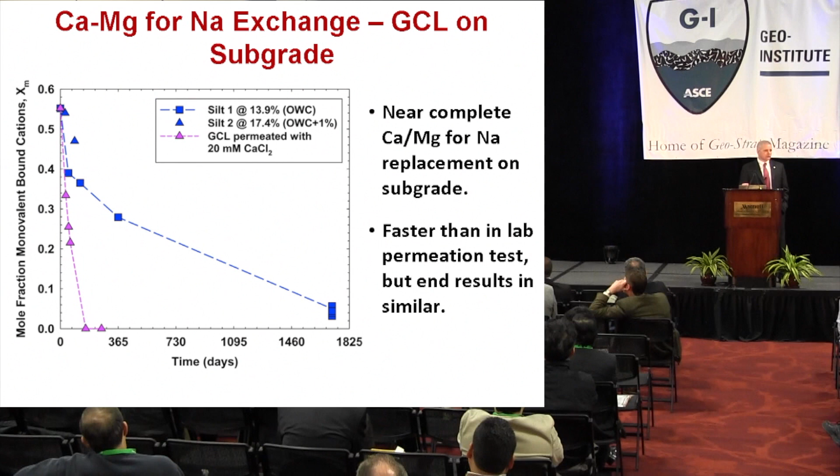We look at the hydraulic conductivity of these materials in the exchange complex. What we see is that over time, as we're hydrating the GCL on these subgrades, we're gradually having a reduction in the amount of bound sodium. That's what's shown here, and the sodium fraction in the bentonite is being reduced. That's transforming it to a calcium or magnesium bentonite, reducing its swelling capacity and altering its hydraulic conductivity.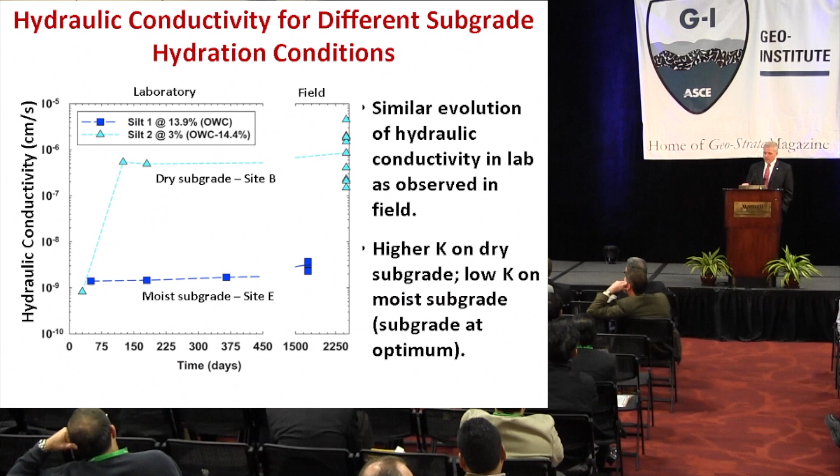And if we look at our hydraulic conductivity, a dry subgrade transforms to a calcium and magnesium bentonite, never has the opportunity to go into osmotic swell, and ends up being a very permeable material. A moist subgrade, on the other hand, shown here at the bottom, has a much lower hydraulic conductivity, even if it undergoes some cation exchange.

So the only question we have remaining in the last couple of minutes is this preferential flow phenomenon that we observed. Everything else we've been able to explain based on the physics and chemistry of the process. The only thing that's kind of hanging out there is this preferential flow phenomenon - very unusual behavior. We had these almost oxide stripes in the needle punching that we observed. We were trying to understand what was going on.

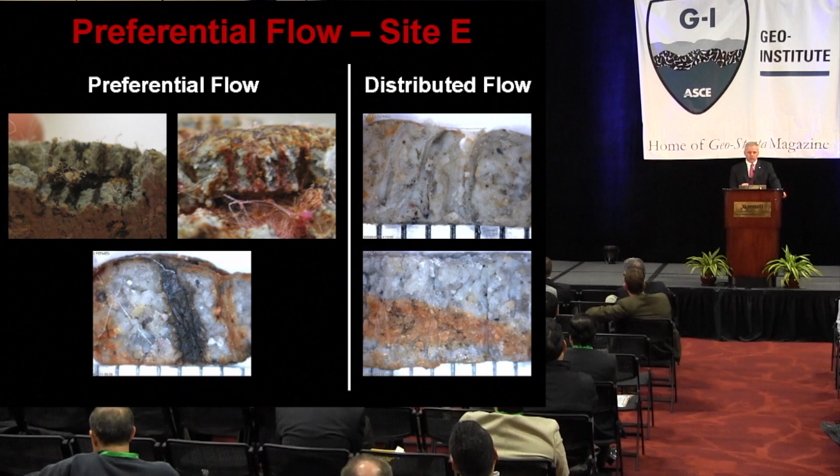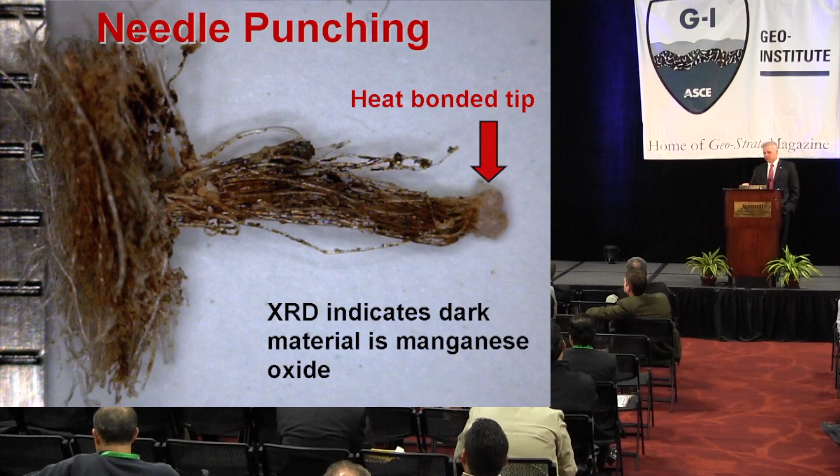And what we did was to understand how GCLs hydrate when they're placed on a subgrade. So we did some experiments, which I'll illustrate in a minute. But you can see we pulled out some of these needle punching fibers - look at all the oxides present in these fibers. It looks almost like tar in there. All right, this is a fiber that's been pulled out from the GCL. So this is a cross-section of a GCL.

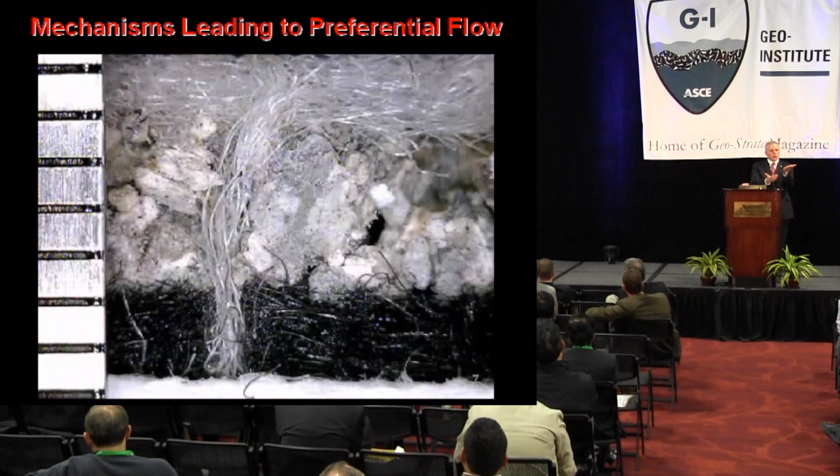We put GCL on a moist filter paper. We then allowed that filter paper to wick up water that had rhodamine dye in it and essentially hydrate the GCL from the bottom up. That's what's occurring. You can see at the bottom here the red rhodamine-laden water at the bottom, the needle-punching fiber. It looks kind of gross, actually.

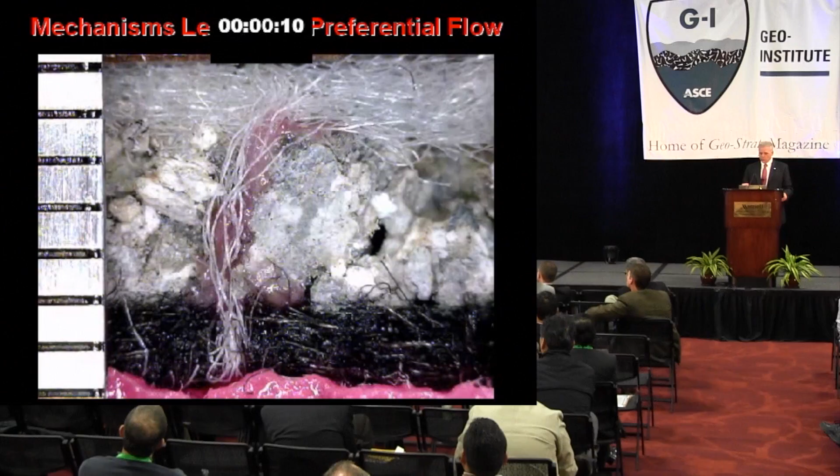We'll go back and just look at this one more time. But here was the fiber - the water makes its way up through the fiber, shoots up through it, hydrates the bentonite around the periphery, and then this kind of swollen zone moves back out. So we'll just watch that one more time again: shooting up, moving out, and then propagating.

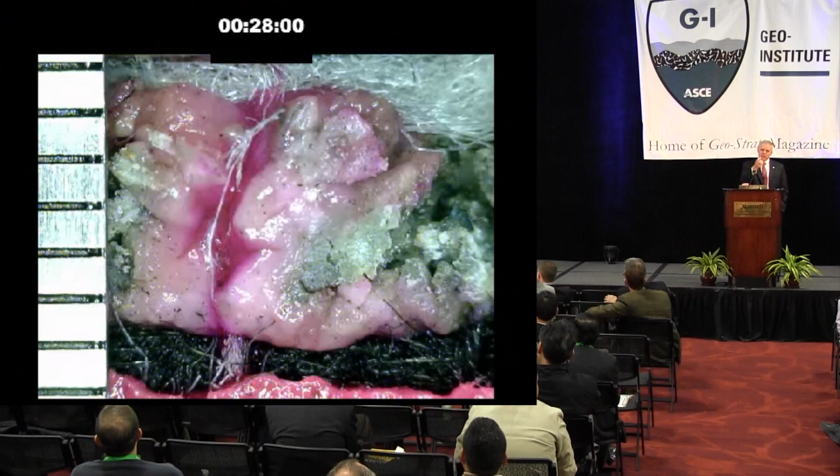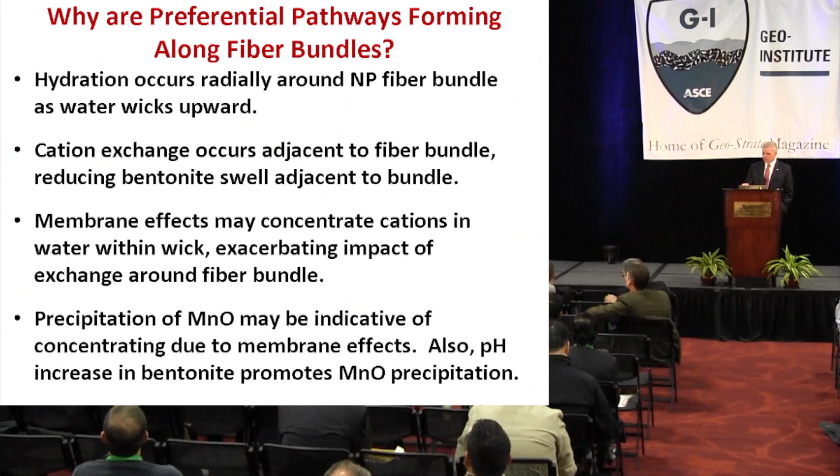What we believe is happening is that as that water makes its way up through the needle-punching fiber, it hydrates the bentonite around that. There's some osmotic effects there that are preventing the migration of cations into the bentonite, resulting in an accumulation or concentration of cations in the fiber, and ends up with precipitation of metal oxides within the fiber itself, which then form preferential flow paths. That's what we found essentially - this concentration within the fiber is what seems to be precipitating, in this particular case, manganese oxide that was present in the pore water in the subgrade.

So what have we learned here in my last couple of minutes? I think there's some simple lessons: regardless of our cover system, sodium bentonites used in covers will transform to calcium and magnesium bentonites.

We find that to be almost universal. I say almost because there are a couple cases where it doesn't occur. In fact, we found that in liners too. We've just completed a study on composite barriers used in liners, that over a period of about 4 years, a sodium bentonite placed on a traditional subgrade overlaid by a geomembrane will transform itself into a calcium or magnesium bentonite. That isn't necessarily negative, it's just a phenomenon that does occur. It occurs in all barrier systems wherever a GCL is placed against another soil layer, in almost all cases.

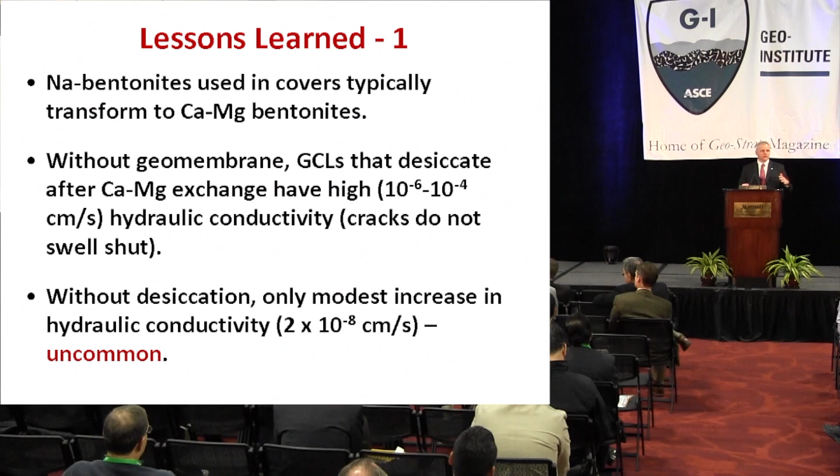If that occurs and the GCL desiccates, we'll get a very large change in hydraulic conductivity. That's because we've taken a material that has high swelling capacity and changed it to one that has low swelling capacity, and when it dries and shrinks and cracks, it can't swell back up and heal the structure. So if we allow it to desiccate, we're going to end up with a very permeable system. Without desiccation, we'll end up with just a modest change in hydraulic conductivity, about 2 times 10 to the minus 8, about a factor of 10, due to that transformation from sodium to calcium form and the modest reduction in osmotic swell that occurs as a result.

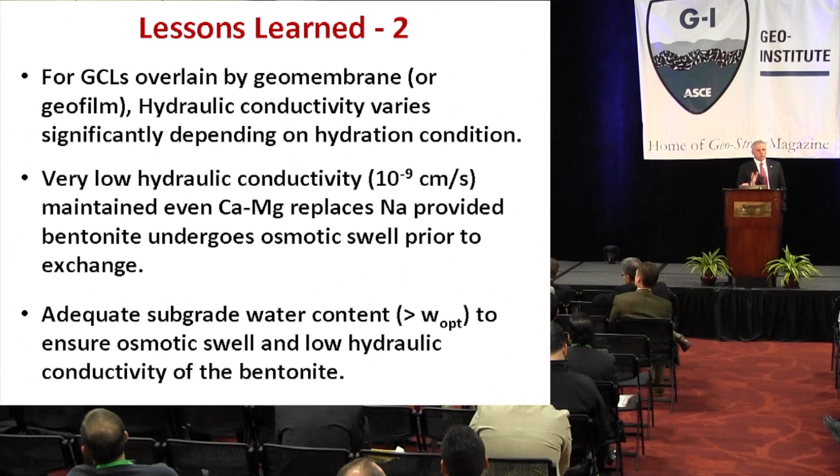Lesson learned number 2: if GCLs are overlain by a geomembrane, the hydraulic conductivity varies a lot with the hydration condition of the subgrade. We get very low hydraulic conductivities if our subgrade is moist enough. What we find is that a specification for that should be that the subgrade should have a water content that's at least optimal, or a little bit more. There are other unintended consequences of that we need to think about as well. We also find that the hydraulic conductivity of exhumed GCLs can be very sensitive to subtle variations in the chemistry of the pore water, so it's very important that we use a pore water that replicates the field reasonably well.

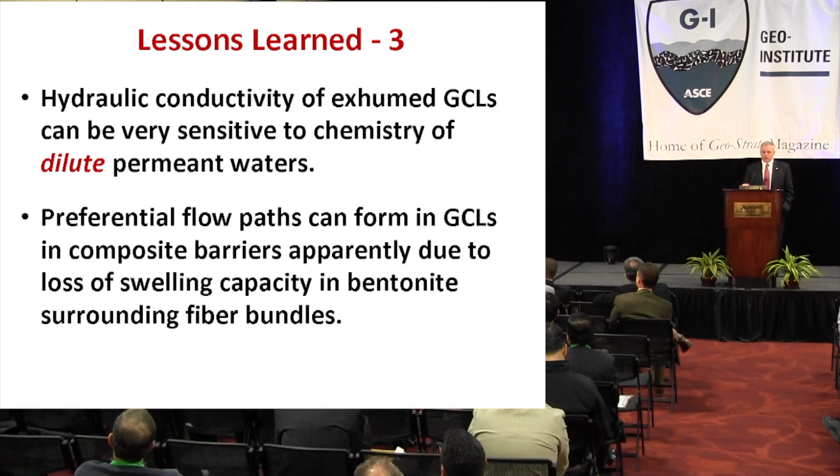And then finally, these preferential flow paths that we observe - that's a phenomenon we don't fully understand. That's something we need to be thinking about and trying to understand.

Some lessons for practice that come out of this for designers - and this is really where we're coming back full circle in the end, that's where we want to get at - is that we want to use GCLs. If we're using GCLs in cover systems, we need to use them with a geomembrane. They're great in composite systems. Used by themselves, they're prone to problems, and so we shouldn't use them in isolation. We should use a composite barrier. A geomembrane GCL is a fantastic barrier. We've seen lots of great field performance from that. That's a system that works very well.

And when we do that, we want to ensure that the subgrade has adequate moisture content to allow osmotic hydration of the bentonite - that needs to be at least optimal water content. But when we do that, we also need to think about other things. When we bring up the water content of the subgrade, we also potentially bring in shear strength issues, so there are unintended consequences we need to be thinking about as well. And then finally, from a testing point of view, we need to use waters that replicate field conditions reasonably well, and we built that into the ASTM D5084 standard, the most recent version of that, which came out in the last year.

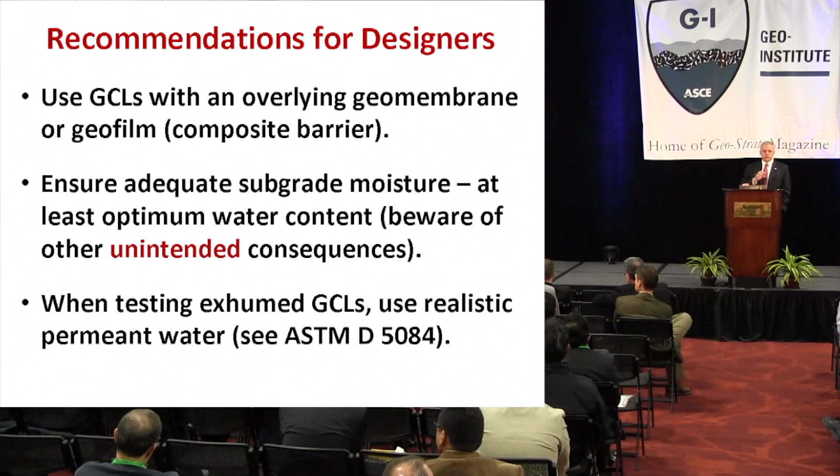And so all of that work is distilled into 3 very simple principles for design: use GCLs in a composite barrier system, use a subgrade that's adequately hydrated, and then if we are going to test GCLs, make sure that the pore water or permeant water we use represents the pore water in the field. 3 very simple recommendations distilled out of the research process.

So that's the end. I finished in 60 minutes. I practiced that - I got right on the money.